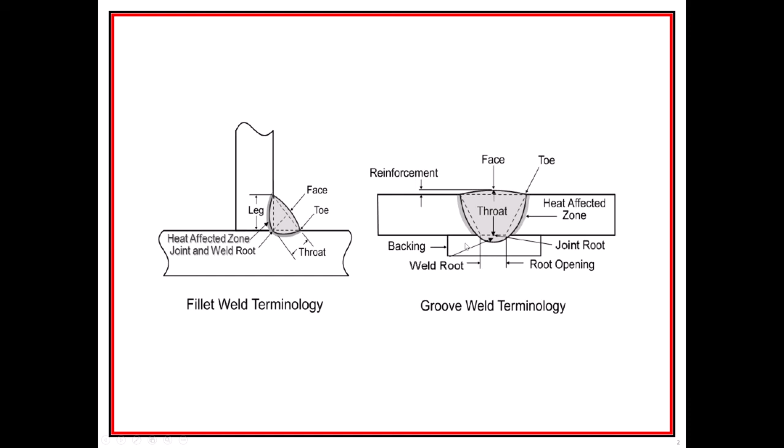Now, the welding I'm most familiar with is SMAW, or stick welding, which is shielded metal arc welding, where you have these electrodes that come in boxes, and they're coated with this ceramic type of material that will heat up and melt away. And as it's melting, it makes this gas that protects the molten metal. The combination of the electrode melts away, and it's the filler material.

So you're heating up the work and it is starting to melt and pool, a little section of it, but also the electrode is melting, and at the same time, there's gas that's making this protective little shield that's keeping oxygen from bonding with the molten metal, because you could imagine interior kind of corrosion that would happen, which would weaken the weld. So we need to have this type of shield taking place right here. So that's the shielded metal arc welding, or the stick welding.

It's probably, I wouldn't say the most common, but it's the most straightforward one. If you're going to do a small amount of welding, you would get a welding machine and get a bunch of different electrode sticks. And there are all kinds of different electrodes for different tasks. There's some generalized ones that you might become familiar with: the 6010 and the 6011. We'll talk about what those numbers mean, but those are the most common. Also a 7018, that's also very common. And those numbers mean something.

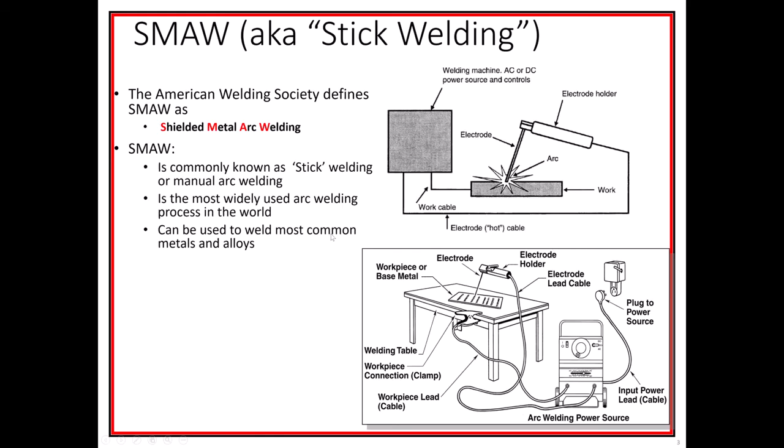All right. So learning to weld is a really cool thing to do. I really encourage you to do it. But it is very much an art form. If your penmanship isn't very good, there's maybe a good chance that you'll struggle with this, because it is a hand-eye coordination type of thing.

And there's an artistry. A really good welder can make a lot of money, but it is definitely not just a science but an art. It's a very difficult skill to acquire, and it takes a lot of training, especially when you have to weld in other orientations.

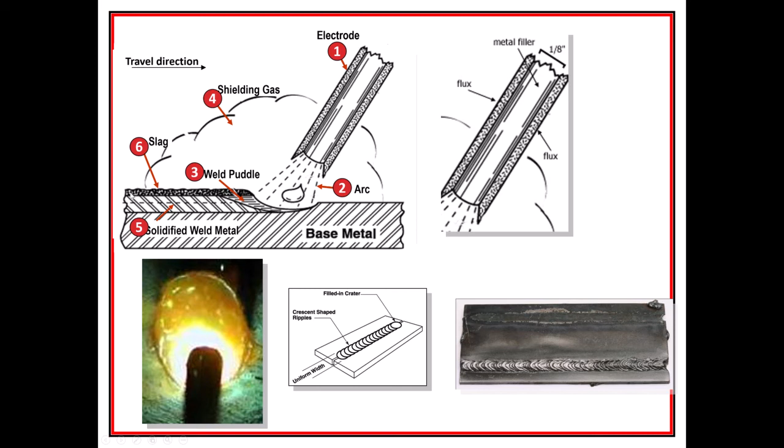So when you're done with a weld pass, you'll have the slag, which is really a combination of what's happening with the shielding gas and also some impurities, and what's left over from not only the shielding gas but this flux, right? And you have to chip away. It's kind of a fun thing to do, because it's almost like a coating that happens after you're done with the weld.

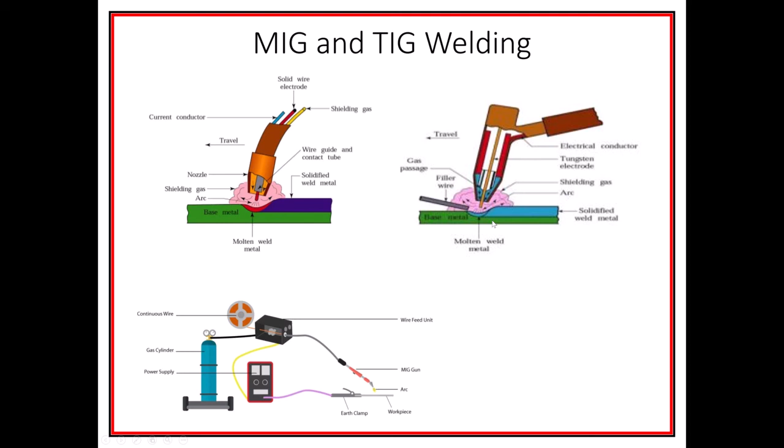And the speed of the travel, the speed at which you're moving the thing back and forth, the speed of the filler wire, and also the flow rate of the gas, which can also blow the puddle away, so you have to be careful with that. And also the voltage or the amperage that you're putting into this. All of those need to be manipulated, and some of it has to do with the thickness of the material. Because if you have a very thin material, too high of a temperature will blow through it.

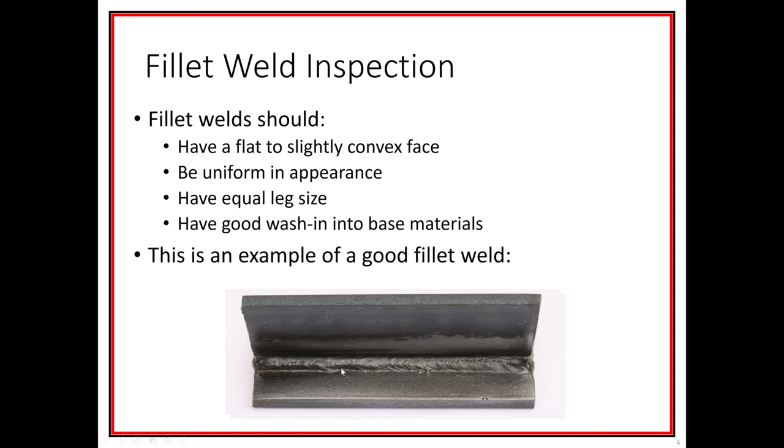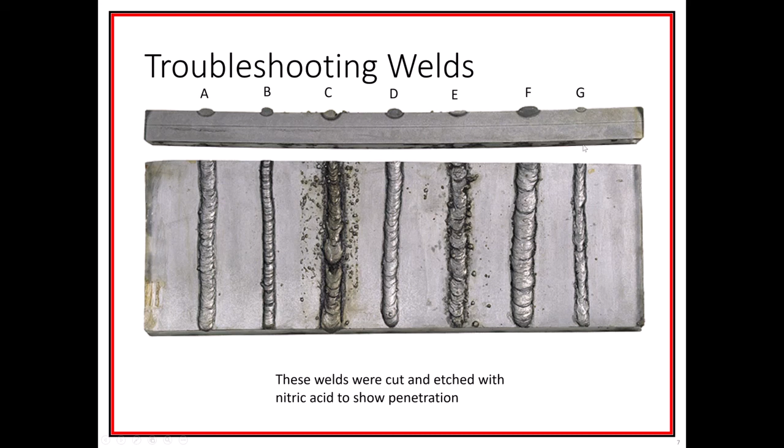This has a very bad pace. This is probably really fast and it's inconsistent speed. This is really probably too slow right here. You're seeing globs and it's inconsistent. You can see it's globbing up, and this is too thin. This is probably too fast as well. And you can see bad welds.

The best way to judge a weld, unfortunately, is destructive testing. To actually take the weld and cut it apart, and then etch it, polish it up, do some penetrating dye into it. And you could see there's these gaps inside, and you could see that it's not penetrating all the way through. So these are bad welds. But unfortunately, the destructive test, obviously, you can't always do that.

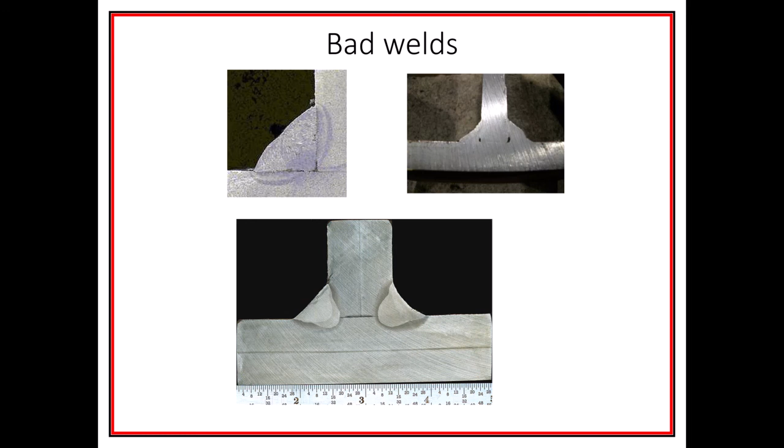So if you're a qualified welder, you'll have to pass the test, and you'll have to maintain that qualification and demonstrate different welds, and then they'll destroy those welds and inspect to see if you're passing with the amount of penetration. So once again, it's a difficult skill, and it's an important skill to maintain.

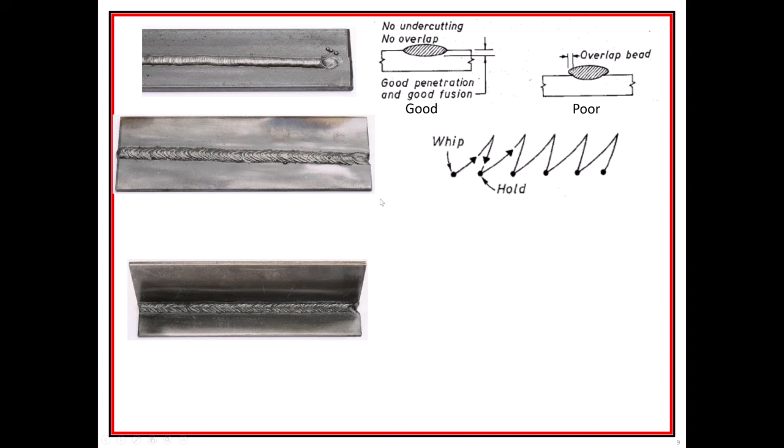Here's a whipping and the hold. Actually, the speed that you go back and forth in the zigzag pattern will also determine what your outcome is going to be. And look at that! Look at that beautiful weld right there. That's a thing of beauty. That's like the stack of dimes that they're talking about.

So let me end this show here and just go to a couple different welding videos. I have them queued up to places I thought were important. I don't recall what they are.

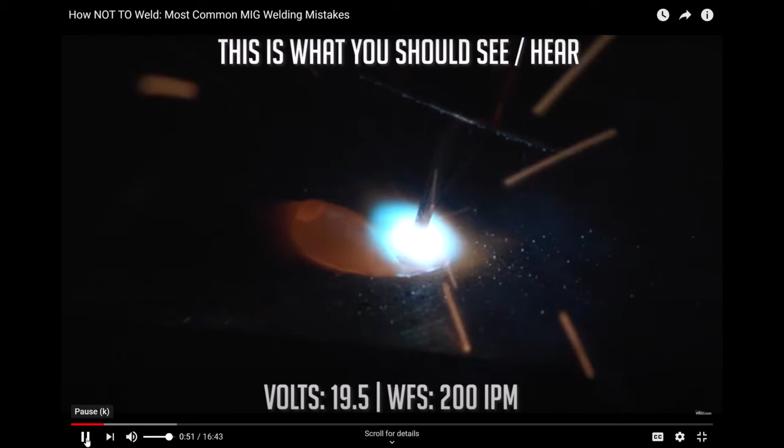Rust and mill scale could be a huge difference when we get into slag or heavy amounts of rust. Very smooth, decent bead. The sound to me was pretty crispy and pretty solid. It's round, the bead's rounded up a bit. Doesn't have any place for it to go. I'm just listening to the machine for stability. This was on a piece of clean material.

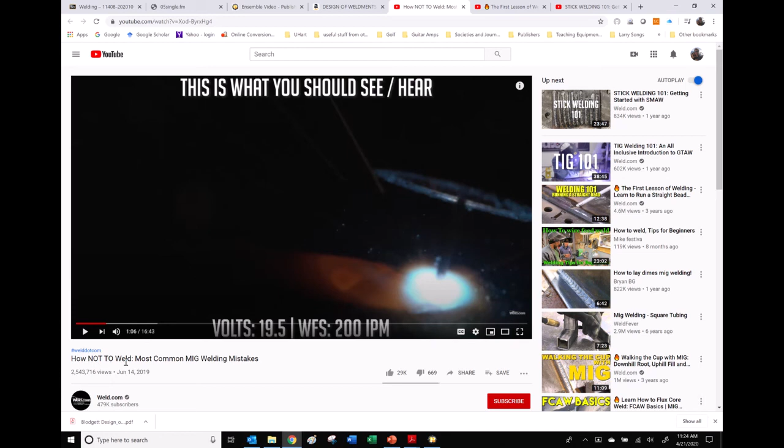Okay, so this is a MIG weld, I believe. That's the title of the thing, How Not to Weld, the Most Common MIG Welding Mistakes. I had this guy, this was a first lesson.

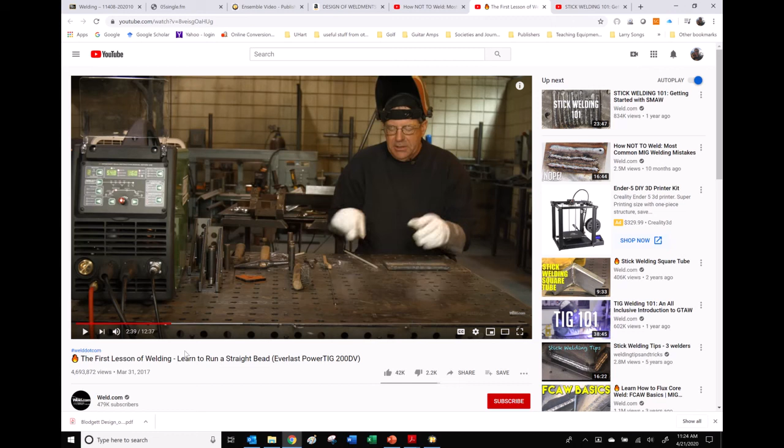Okay, so this is stick welding. So you can see what's involved here. And let's concentrate on doing this. All right, so there's a stick weld. See some slag peel. This is a stick weld. You see he's going to put in the electrode.

Come on, darling, light up here. Don't be that. This is probably the most difficult part of welding when you first begin. He's not a beginner, but you can see that he's having a little difficulty getting an arc started. It definitely likes to stick.

A lot of times he's just getting it barely, so it doesn't stick right now. You would expect him to be a lot better at getting this started. But you can see that he's supporting it on his elbow right here. And it is very difficult, especially with this long stick, to not get the end shake.

I'll mention something historically. These new shields, I don't know how long ago they came out, have a special screen right here that you can see through when it's not welding, but as soon as that arc hits, it'll change the opacity. We used to have to use traditional welding glass you can't see through. It's too dark to see through.

It's only when the arc starts that you can actually see the arc, because you really need to protect your eyes from this. You will hurt your eyes if you look at a weld, so don't ever do it that way. Here we go.

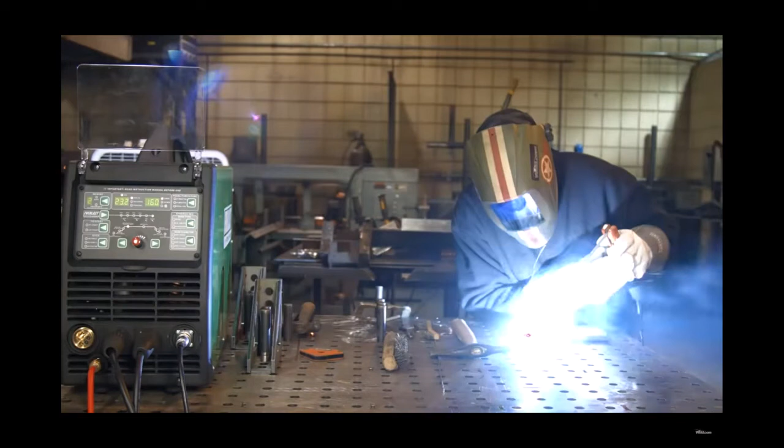I need to explain what I'm seeing and what I'm feeling here. I have this rod leaned back probably about 40 degrees or so. I also have it pointed toward me about 10 degrees, just so I can get that slag running behind me. The whole weld pool, man, I'm barely touching the plate. I can feel the plate. Woo, there we go.

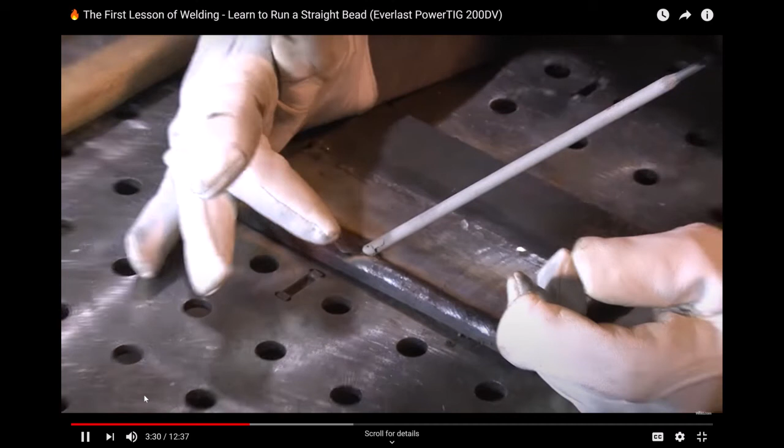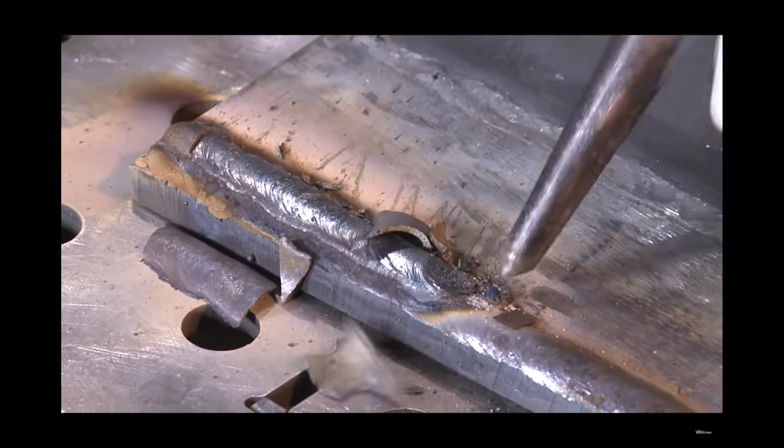Welcome to stick welding. I'll see what happened here. I've got a big old crack in my slag here. It just kind of fell off. So I've got an electrode that, not good, not good, not good. Got an electrode. You need to check the flux on them. I found a 6010 the other day that had about, I don't know, about a third of the way up from the start of the rod.

Now, you could not even see him making that motion. That's how subtle it is, the zigzag back and forth.

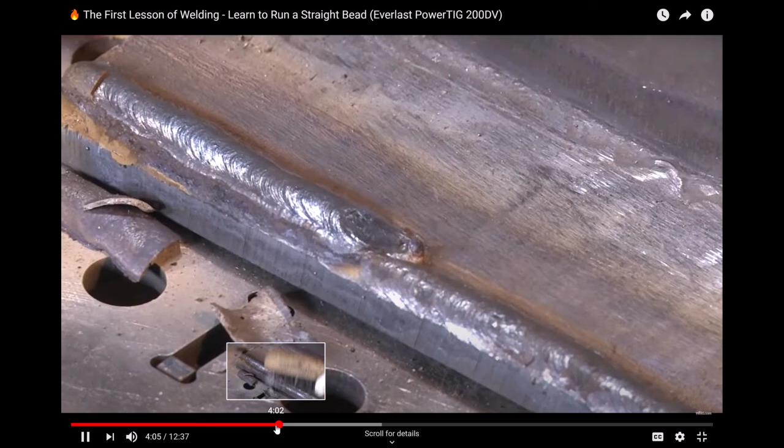I'm going to leave that little dingus on there and see if I can weld over the top of it. When I restrike this rod, I want to restrike it out here in the direction that I'm going. I want to kind of long arc lift over and bring it back into the top of this pool here and take off again.

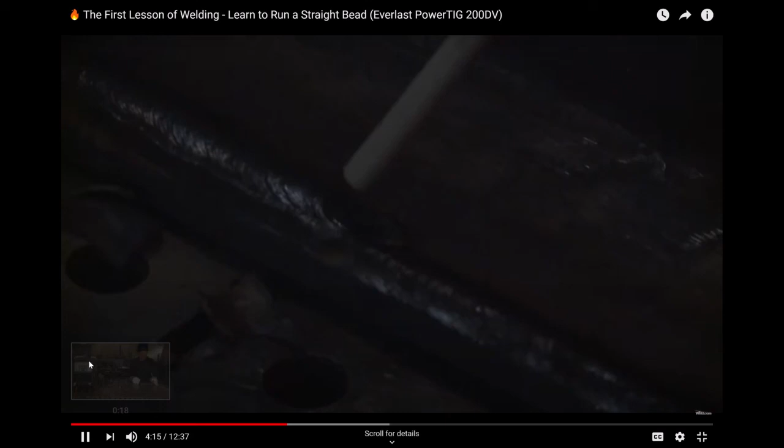We're back in business. Again, I think I was just getting ready to say I'm barely dragging the rod, touching the material, barely. Last thing you want to do with one of these rods is gouge the plate.

Now here's something to pay attention to when we come out here and terminate the weld. Please do not get into the habit of running this crater out here on the edge of the weld and blowing it up. Run the rod back in and fill that up a little bit. Please, please do that for me.

It's good craftsmanship. He's wearing glasses, but he should really be wearing some goggles as well, because that slag will bounce off your forehead and into your eye. Not getting a slag peel, but it doesn't take much to get this off here. Okay. And that's a decent looking weld.

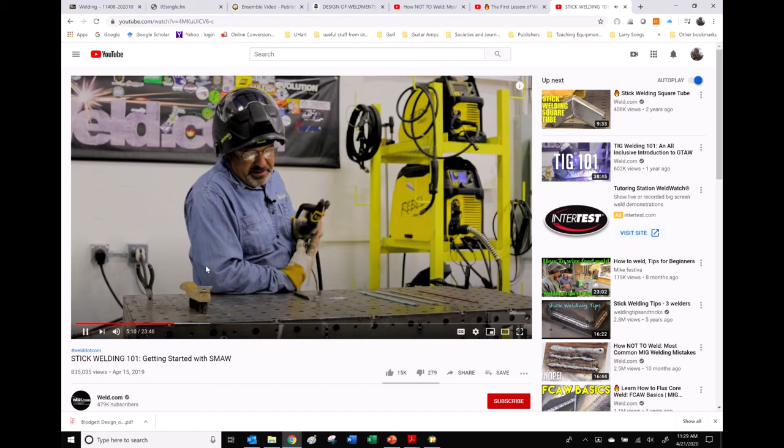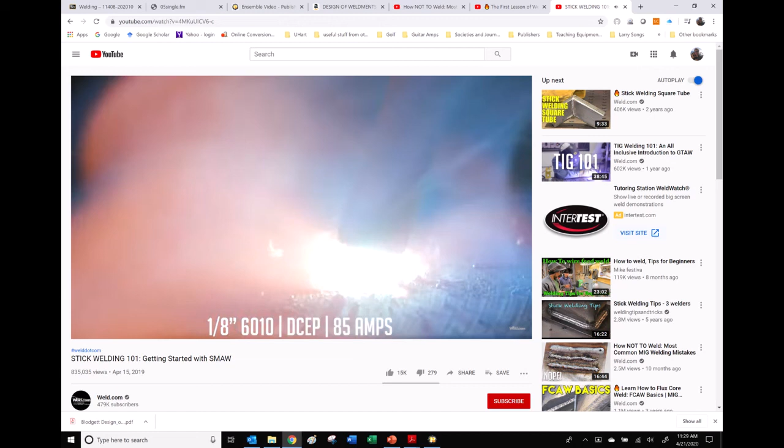And let's see, lastly, I'm going to run about 85 amps. And I'm just going to strike an arc and use a very slight rocking motion. Just back and forth and just kind of carry the bead along. That's all I'm doing. Real simple. Keeping the rod down close, barely dragging the rod on the material with a very slight pitch.

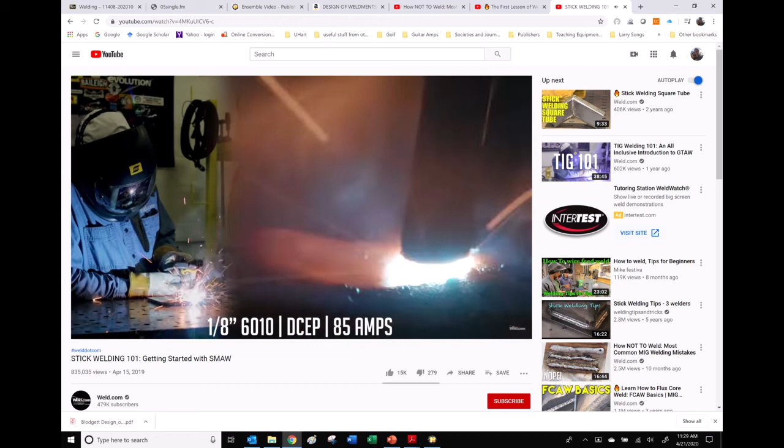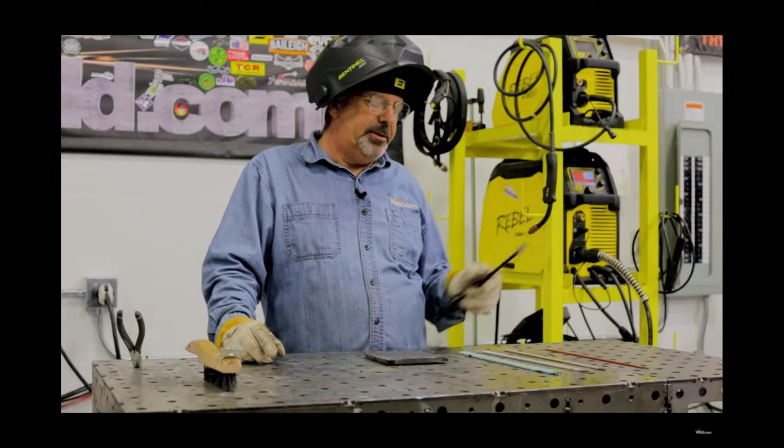So this rod, the nature of this flux produces a, I want to say a light crystally type of flux. It doesn't come off real easy. It doesn't come off connected, I should say. But don't beat it, because it can become airborne if you beat it. Come right back and stick in the lip or go in your eye.

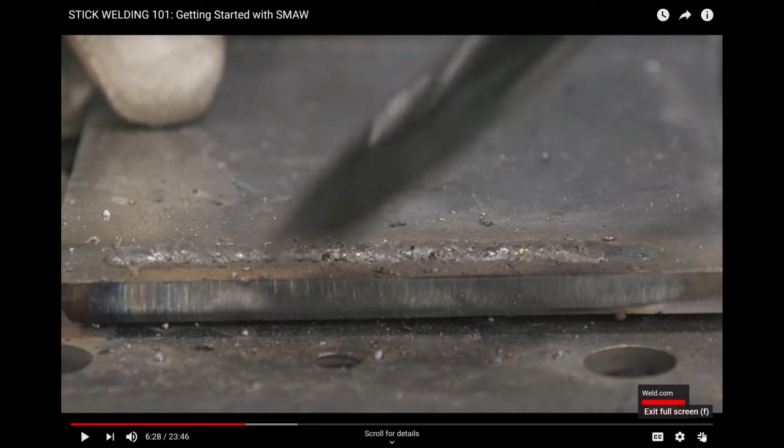So generally let it cool. Scratch on it. Wire wheel with a grinder or hand wire brush, one or the other. This rod does produce a fair amount of spatter. No, I don't like his weld. It doesn't look very pretty, but I think maybe he just needs to clean it up.

So anyway, it's an interesting thing to check out. And I'll be continuing some more with things that you would want to know. Well, let me make another video. That was just the introduction to welding. Let's talk about welding symbols next in another video.